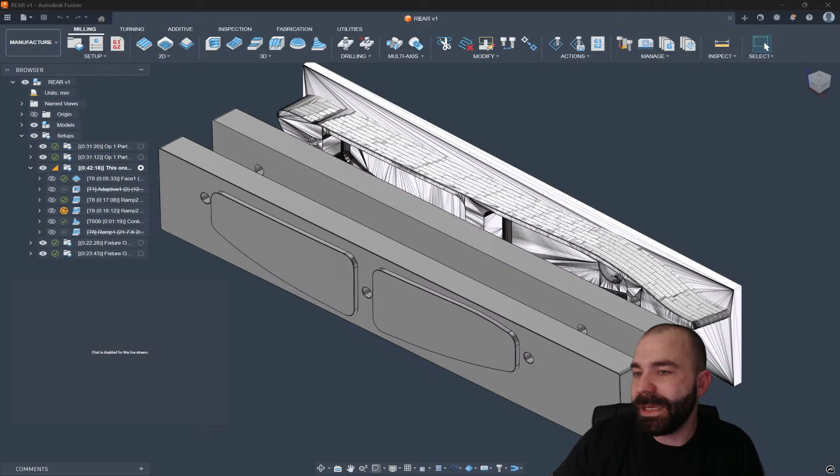In the meantime, Stuart sent me in a part, and his request on this part was we're going to skip over his first sentence here because I don't think you guys need to know that, but tidy up this 3D undercut I'm doing with the radius. Well, Stuart, can you go ahead and throw in chat to make sure? Let's see here, Woodruff style tool. I think I did under there, but I haven't used ramp. Okay, what setup is it in particular that you're working with?

I do have to jump back over to my screen in 40 minutes. Awesome, Ace, we're going to have to jump over there and make sure we catch this live, of course. So there's the limit, we're going to go ahead and cut this off about 5 minutes before the top of the hour. I know there was some conversation about using ramp.

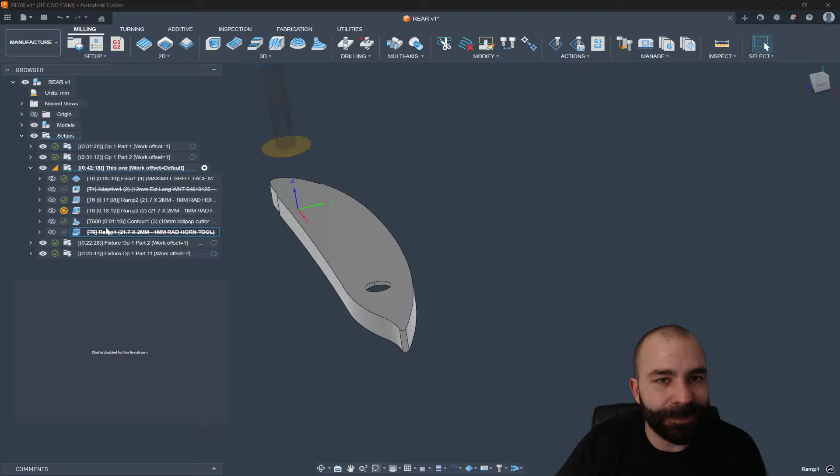I think I'm on the right setup, Woodruff with ramp. You have that labeled in here any good way, or am I on the right one? Oh, this one, of course, see? Answer my own questions when I look at it. So we have this setup, we're looking at a couple different tool paths here. It looks like he's doing some contour there on the inside.

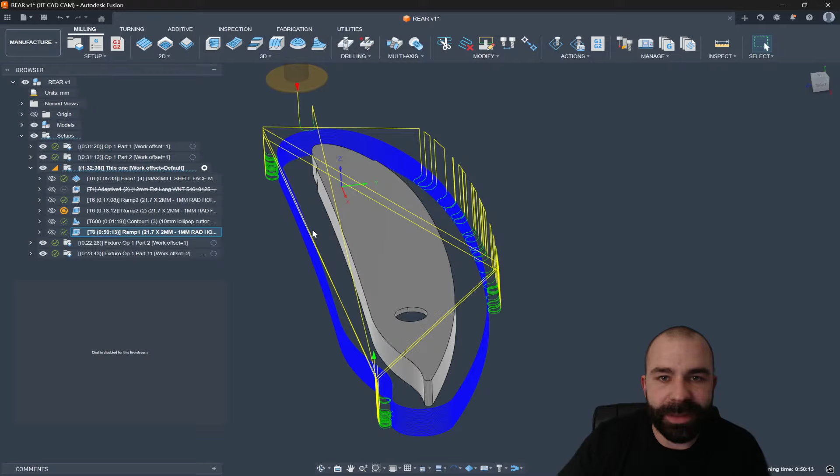Awesome. Stuart, do you not have the machining extension? You could easily deburr that hole if you had the machining extension. But either way, we're going to get back to this. So I'm going to go ahead and unsuppress this. Now I believe some of the problems that you're having right off the rip, Stuart, is you're trying to undercut, if I remember. And with that, I'm going to go ahead and do an inspection accessibility analysis.

Now, what this will tell me is whether or not there is undercuts on your part. So for those of you that don't know, right now, based on this flat surface, anything in red is considered undercut, which means the tool needs to get underneath that profile.

Again, if I was unsure about the top being flat, considering his Z-axis is that direction, I could go off the bottom of his part, and then flip to direction number 2, giving me the same results. Now, if you didn't know, you could also leave this on if you wanted and toggle that on and off over here in your design tree at any time.

So let's get into his toolpath. I'm going to go to his ramp, and with that, we're not utilizing any type of multi-axis, so we're going to skip over this and look at his geometry. Now, he does have his tool outside of his boundary.

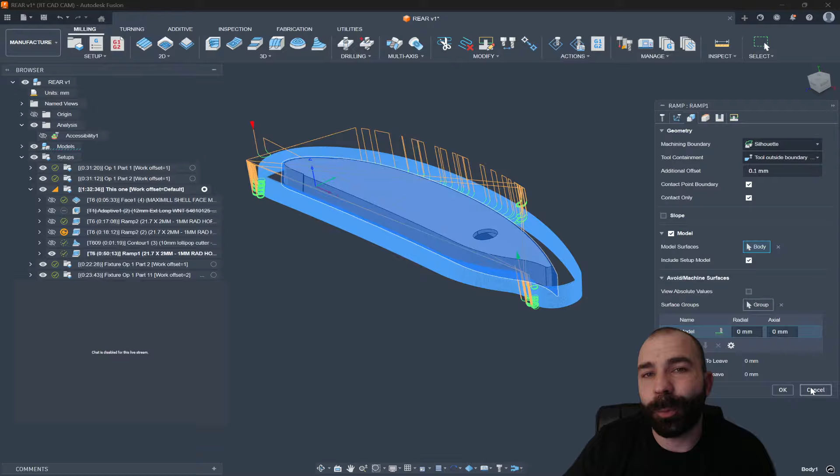Everything looks good there. However, his big problem is the fact that when using ramp, you cannot utilize undercuts with ramp, unless, and I say this, unless you're using steep and shallow. I'm going to show you guys the outcome difference between this.

So what I'm going to do is steal his information. Now, there's a couple of things here. One, contour will allow for undercutting, so we're going to grab that to start with.

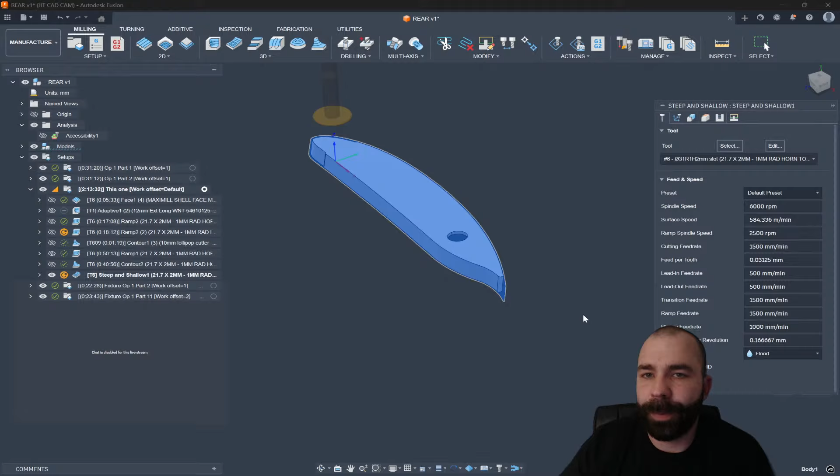And then I'm also going to go ahead and do my derive into a steep and shallow toolpath. Now, a couple of tricks here most people don't know is I actually want to go steep only. And as you're going to see, I now get the ability to machine undercuts and do a spiral, which, if you didn't know, is the ability to basically turn this from contour into ramp, right?

So again, this is why I love the steep and shallow toolpath. I highly recommend it to you guys out there, because we have that ability to utilize either a contour slash ramp, or if we were doing both, right?

So again, applications here, we're just going to force steep only. We're going to go ahead and allow undercuts, and we're going to leave everything else about the same.

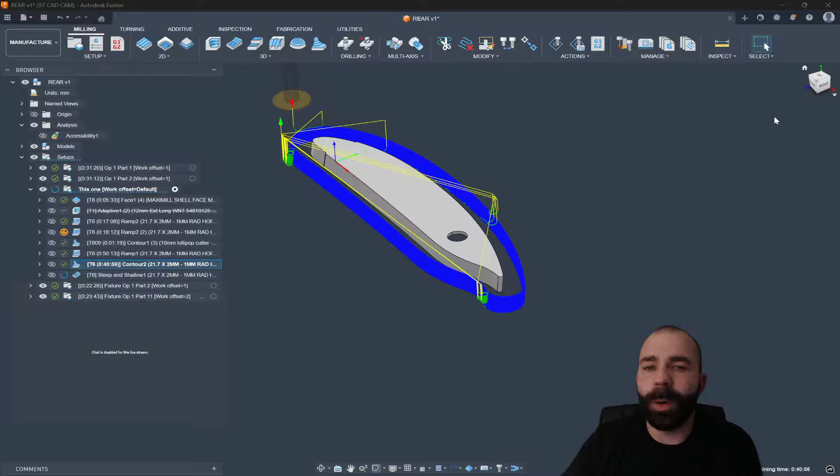I might have to come back and check. But what we would see on this part, I am going to have to do a few other things here. Let's see what else you got going on. We're going to unsuppress that so we can get our material through here.

And it looks like you approached this with quite a few different toolpaths, which is going to make it pretty easy on me to delete and remove those and then just get us a material.

So again, if you out there are utilizing a Windows machine, I'm using the hotkey F8 to turn on and turn off my stock. You could also do that down below in your toolbar by just checking that little pyramid and toggling it on and off.

So as you're seeing here, here is this ramp toolpath. We're going to go ahead and simulate this and see what we come up with. Again, I like to use comparison.

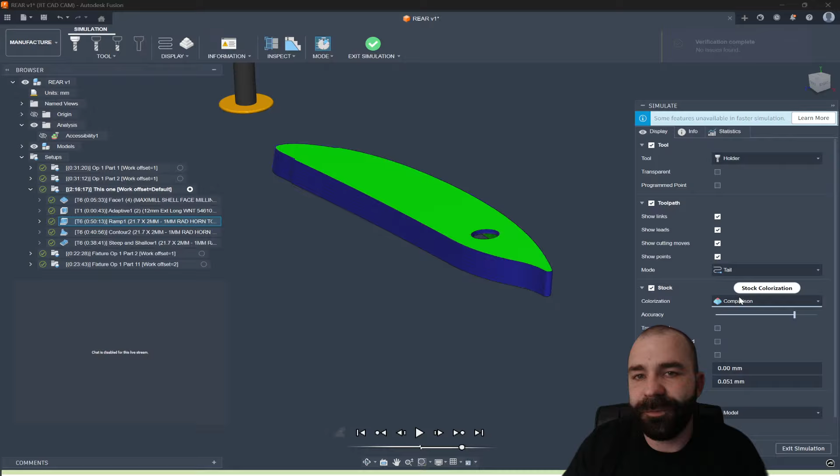Now there's a couple of little bugs here, so you know, if you're using comparison, there is a delay when utilizing fast GPU, but the delay is nothing in comparison to everything else out there. So again, we're going to go ahead and hit the play key.

I'm actually going to go ahead and pause here real quick, and we are just going to do my favorite thing, which is let's go to the end of the toolpath and see what our results come out as. So we'll give this a few seconds to calculate.

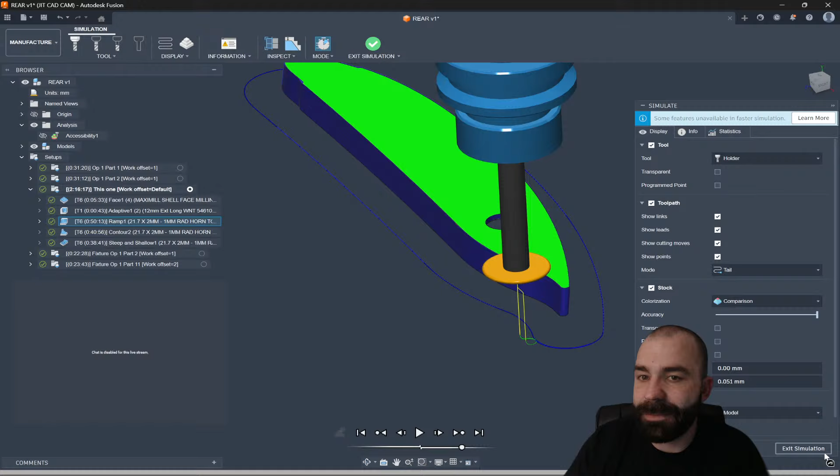Now, presumably, we still have blue material here, which makes me think that you could have stock to leave turned on, so I may need to go ahead and exit this simulation. Let's just double verify that. No stock to leave. Okay.

Now, again, we're seeing material still left on the walls here, so I'm going to step into contour and do the same thing and simulate. I may have to go back and actually use a more traditional simulation here, but let's see what we get at the end of the day once this calculates out.

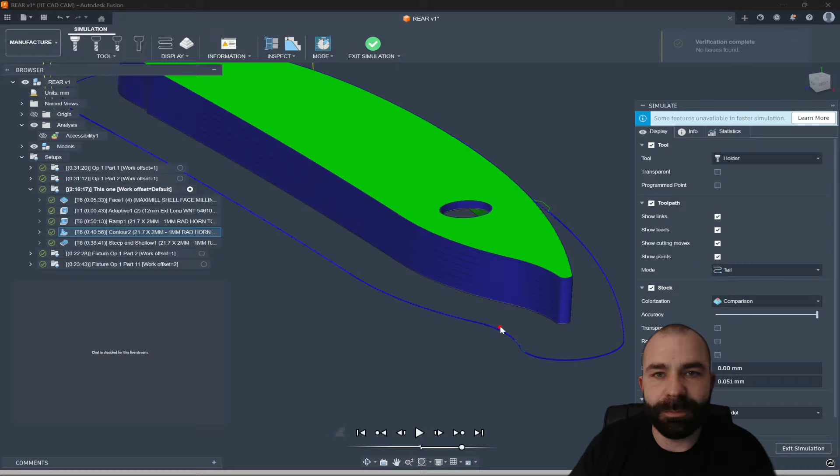So again, we're going to give that a moment. It looks like my material is just not calculating.

If we go ahead and switch from comparison back to material, we can generate that simulation very quickly and see if we're actually undercutting on that part. I'm going to do another trick here, which is say all of toolpath, and then I can more or less jump to a specific point throughout this part. So now what I'm looking for is to see if that tool is actually getting underneath and touching my material.

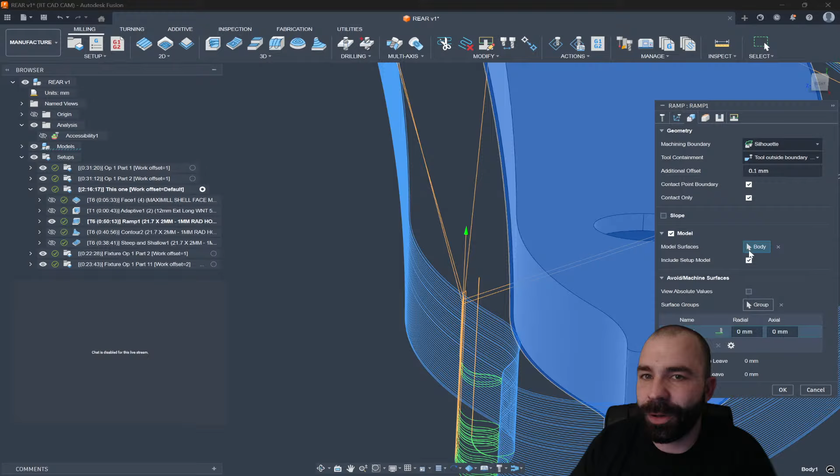It does not seem to be, which I have some ideas about. Let's go back to his toolpath. What all do we have turned on? We don't need model, I'm pretty sure, unless—I should have checked this first. I'm pretty legendary about this, there's multiple models in here, and I'm curious what he's trying to do. Let's make sure we're working with one body.

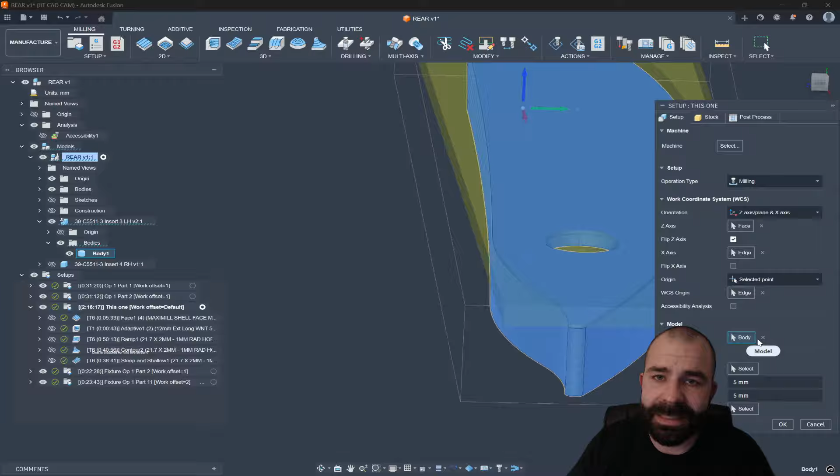We are. Let's go to our setup, of course. Are we working with the correct body? We are. Pro tip for you guys out there, I highly recommend instead of selecting a body, always try to use components. It's going to be much better on you at the end of the day.

For this use case, I'm not going to mess with it in the setup. We're going to come back to it. I'm going to jump back over to my toolpath now. Let's make sure he has that model turned off, as we were talking about. We do have contact point boundary turned on, contact only. This is where I would start turning off quite a bit of stuff.

Another pro tip, if you guys didn't know, if you do selection and don't select anything, you can also get a pretty good toolpath. So what I'm really looking for is to just get something on the part to start with. So, discarded unreachable passes—let's go ahead and do that one more time.

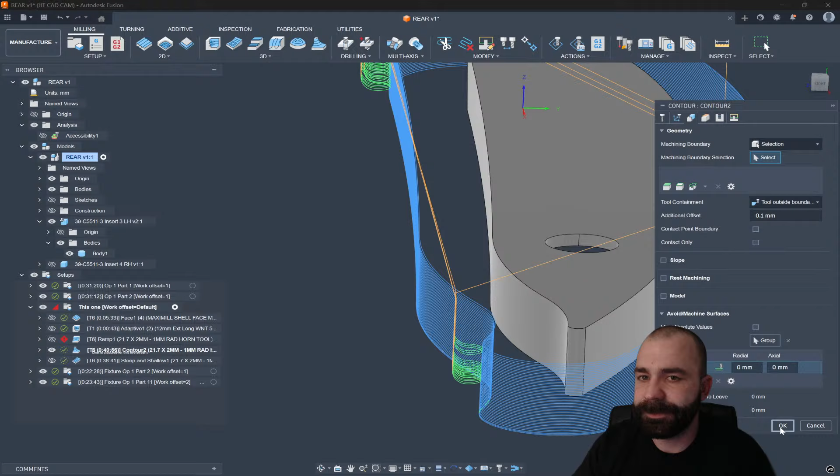We're going to jump over to the contour instead. We're going to say selection, let's get some stuff turned off, and that's going to be tool outside of boundary. Again, let's see if we can get a toolpath on the part before we start messing around too much.

Again, they may have fixed it—you used to be able to shortcut this. So let's go back to silhouette, tool outside of boundary, and see what we get.

I see some more questions coming up in chat. Napster, I see you out there. I will check into ticket 811 here in a minute to see what is going on with it.

This is one of my favorite things, is you're seeing what could be considered the master—I don't know if I'm the master, you guys tell me—is when you get to changing too many things, sometimes you cause your own demise.

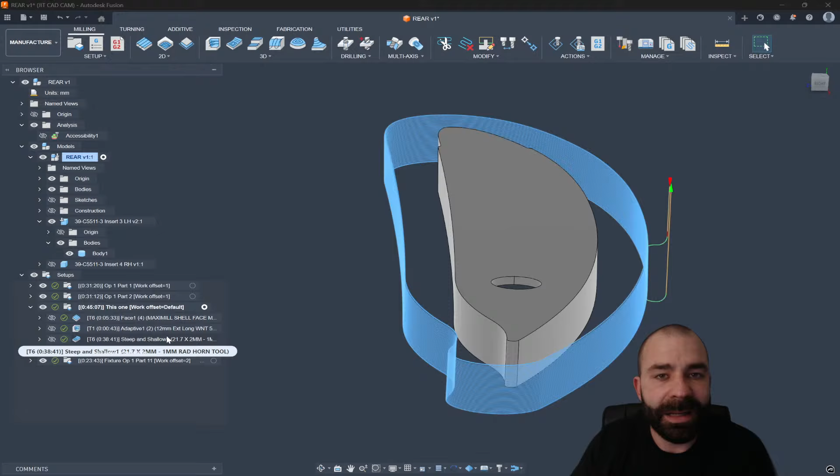So again, I'm going to go in and say contact only, and see if we still get a toolpath or if we don't. At this point, between recycling a toolpath as well as trying to force something after the fact, I'm going to do what I do best, which is go back up there to 3D contour, and let's start with the when-in-doubt, okay-your-way-out kind of move.

We get no passes to link, which would lead me to think that there's something with geometry. Again, we need that tool all the way to the outside of the boundary, and what we're really looking for is to get a toolpath. So again, discarded unreachable passes.

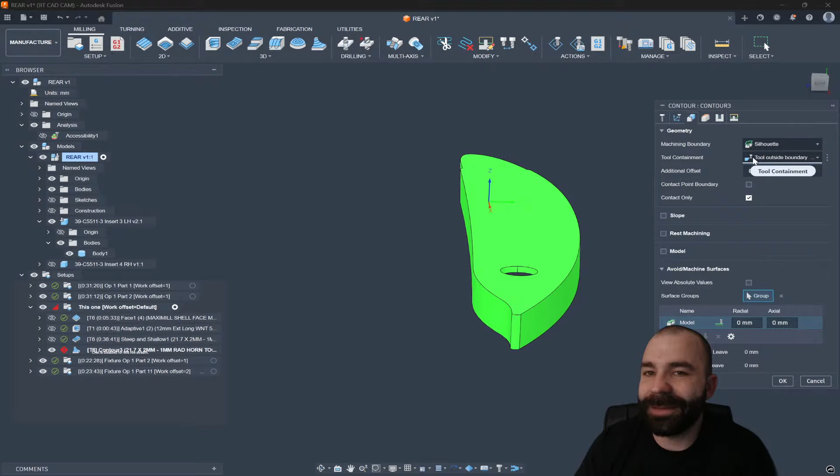Let me know in chat real quick, Stuart, was this something you were fighting on your side as well? I'll go ahead and give you a minute to jump over. In the meantime, I'm going to go ahead and grab that other ticket information. So wait for me here in a sec, guys, I'll jump right back. Got to get this part file downloaded.

And let's take a look here.

Custom tool made for it, but it doesn't want to plunge into the part. Okay, let me see if I can get this downloaded, I'm going to take a screenshot. So you're using more of a dovetail cutter for that.

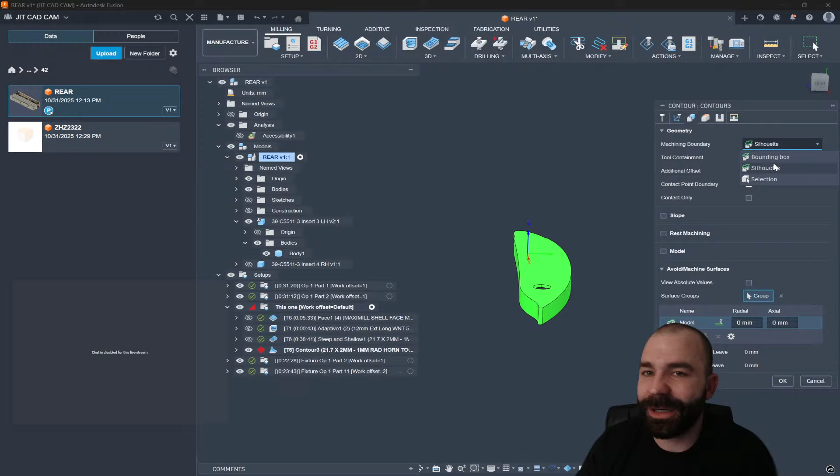So again, something is happening with this part where it does not want to machine it. We're gonna do a few things here, go ahead and go for bounding box. Again, the goal is to get a toolpath on the part. And as you're seeing, even the best of us have problems from time to time. So again, it could be, as he had, tool containment, additional offset 1, let's see what we get.

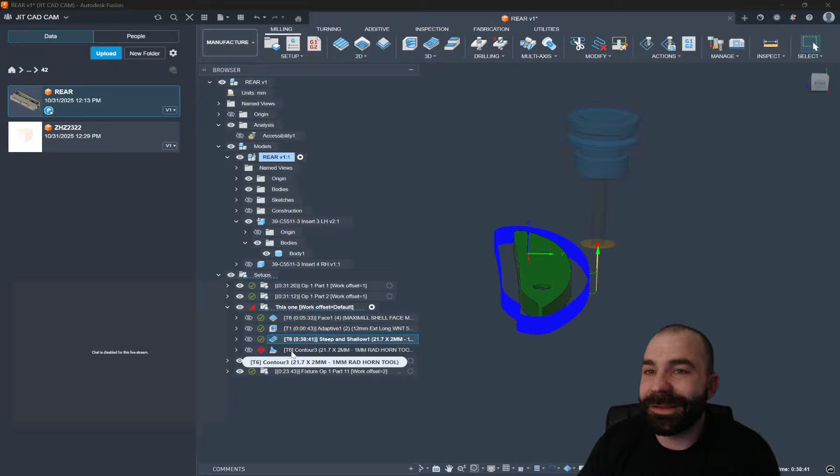I'm thinking that either my Fusion is bugged out, or you guys are probably thinking I'm wild here, but what I want you to see is, if you notice right now, and it might be tricky on your screen, this is why I like the steep and shallow toolpath that I generated. You notice there's a taper here and all those little blue lines. It's a little tricky to see if we spin our part around and look at it.

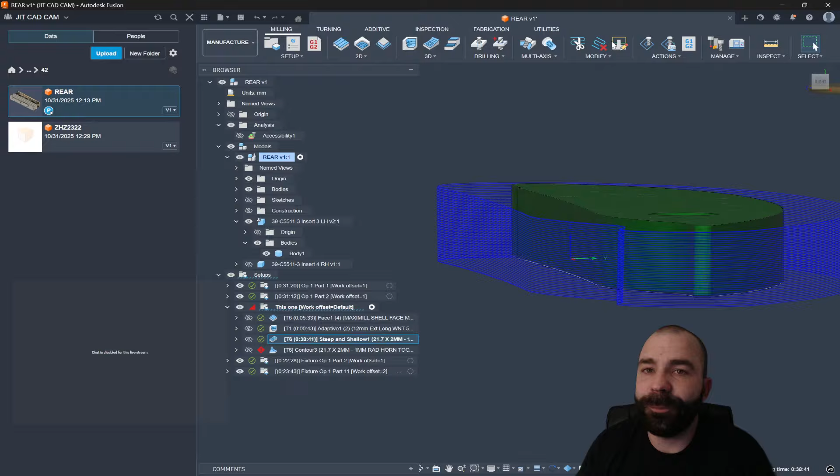However, if we were to simulate this, we're going to notice that when we machine this part, we're just going to go ahead and jump down, and then I am going to do, like I said before, go back to comparison and cause our own problems, if you guys can imagine. And what we're really looking for is to get that toolpath to make contact with the body.

Now, what I'm not seeing, and this could just be the regeneration of stock here, let's go ahead and make sure we don't have to regenerate anything. But we should be touching that undercut area. Now, tolerance is cranked pretty good, so I don't think that is our problem.

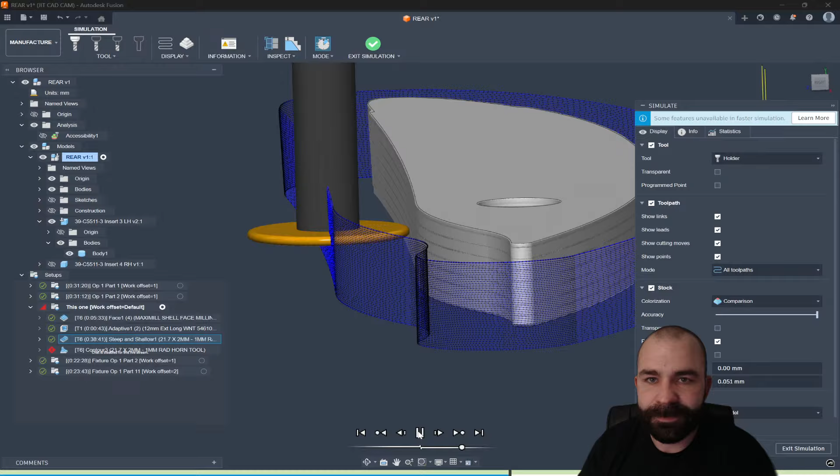And we're going to go ahead and hit play here and see if we can't get it to force that toolpath to come back up. We may have to increase our tolerance, as you could imagine. Another thing is we do have our leftover stock set so tiny.

So let's go ahead and start with just adding maybe a 1 to our stock and see what we get calculated. Again, not the best of situations. I apologize, guys, I have been driving nonstop the last 24 hours.

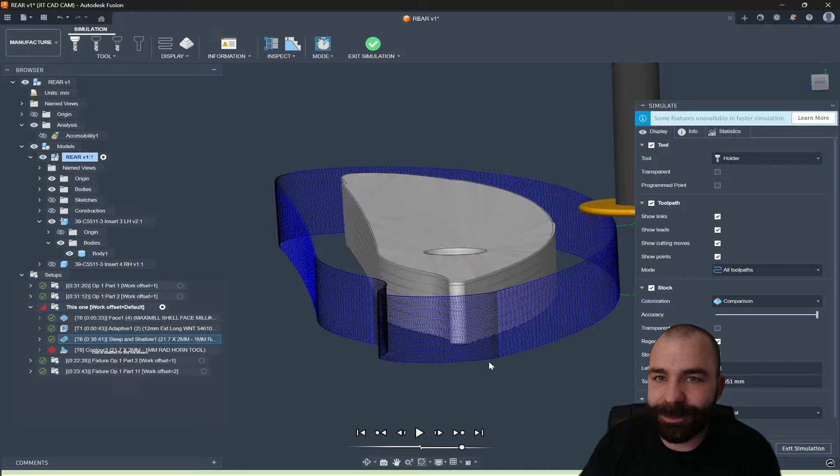And, you know, when in doubt, go back to the beginning and let's see what we can come up with. So it looks like, I think somebody's pulling a prank on me. Did you, Stuart, rough this part out without stock to leave?

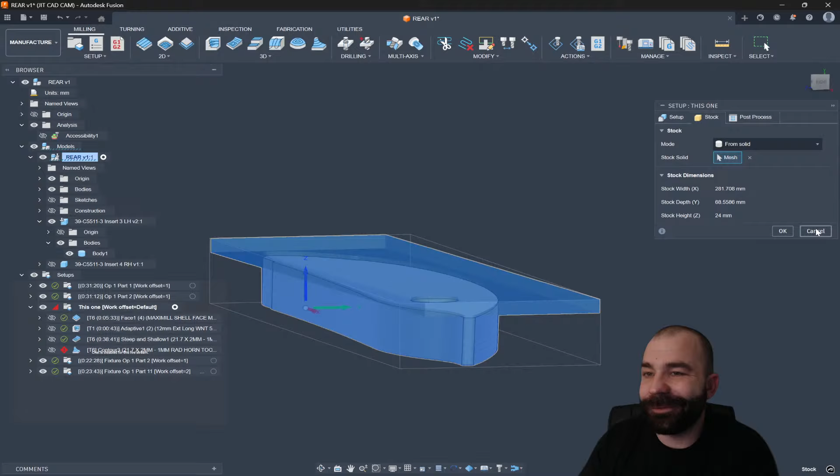Something is going on here. There is something really fishy. I now see some fishiness. This would be quite the dilemma, Stuart. Stuart, you have left me looking for Wizard of Oz because I now see our problem.

I'm gonna hate to be the one to tell you this, but as you machined through this side, you have pulled an old move that we do not recommend, which is when you go to your second setup from A to B, you exported a stock model and you brought a stock model back in. You have done more work than you need to do.

Now, this is a scenario of a left hand, right hand. So I'm going to go ahead and jump up, just let's see if you have the other one here. Yep, okay, so here is your left hand. And then here is also your right hand.

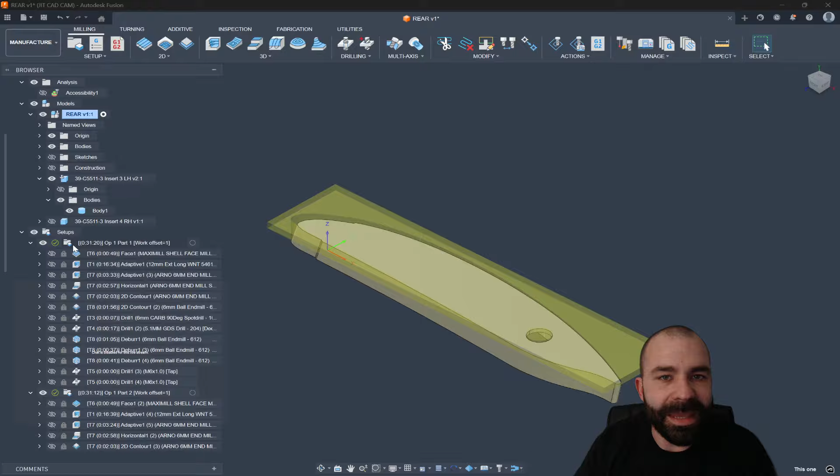Okay, so this is the value of Fusion, taking training from yours truly or watching my videos. But as you guys can see, I am going to go back and adjust. I'm actually not, we're not going to adjust. Yeah, we're going to have to adjust it. I'm going to go back and I'm going to reference the component.

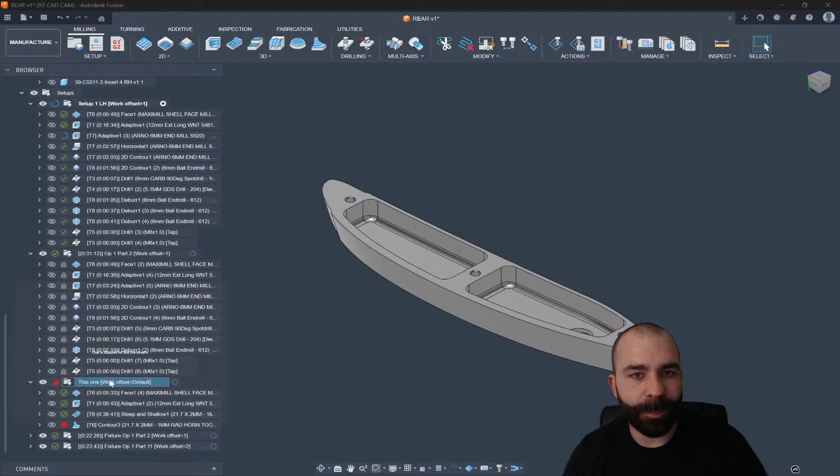We're going to have to unprotect all of his toolpaths, and we're going to regenerate. Now, a lot of people don't understand when it comes to going into setup 2, and just so we can see here, I'm just going to say this is setup 1 LH for left hand. And then we know this is now setup 2 for the left hand one.

Is when I go back in here, had I used components and selected the same component twice, what you're going to see is I can actually use from preceding, and then I can check that box continue rest machining. And then, as I always recommend you guys, click these 3 little dots, save as a user default, because you're never really going to uncheck it.

But what should happen is we are having a problem with transferring the stock from the previous setup. So we're going to go ahead and verify a few things because I think I did not select that correctly. Let's go ahead and go back. Was this a problem you were also having on your end there, Stuart?

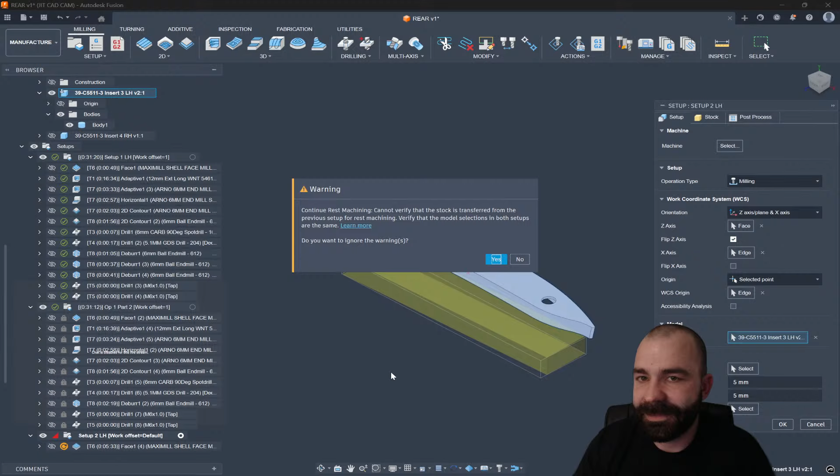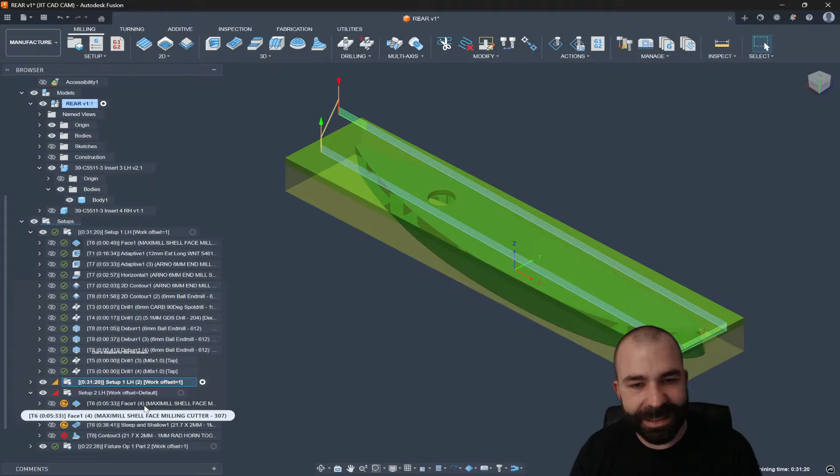Because we should be seeing material transfer from our first setup to our second setup. There's our XYZ, here's our model. I'm going to get your other setup out of the way by deleting it, because I think we're going to be in this dilemma I always hate. I'm just going to duplicate your original setup, flip your Z, now use from preceding. And of course it's going to work, because I'm now going to steal all of your tool paths and drag them over to my setup.

And then from that we should be able to verify - okay, left hand 2, that should be it. I think I dragged the wrong tool paths in here. Oh, I didn't, I dragged everything. That's right, let's get your drilling and everything out of there now.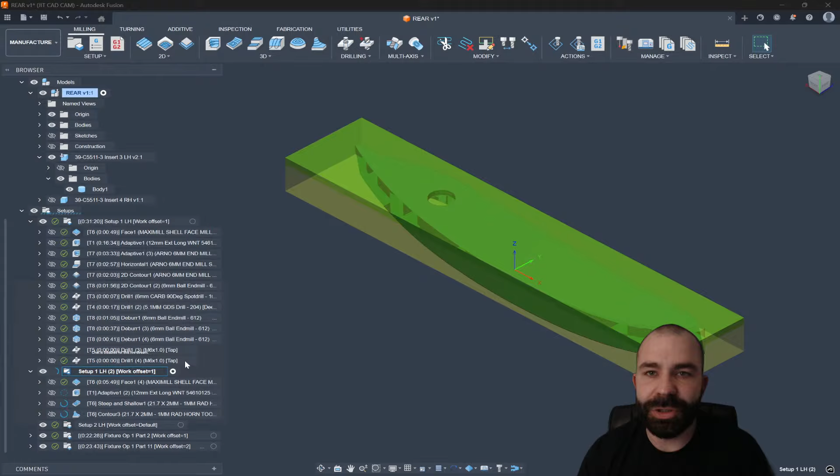So what I think has happened so far into this part is, one, you didn't have the continuous rest machining working, which caused you to use the STL export and import, right? So for some reason it wouldn't carry over. I'm making educated guesses here - pretty good today. But as we're seeing now, this was screwing us over when we were doing our simulation. I think that's where we started running into our problems.

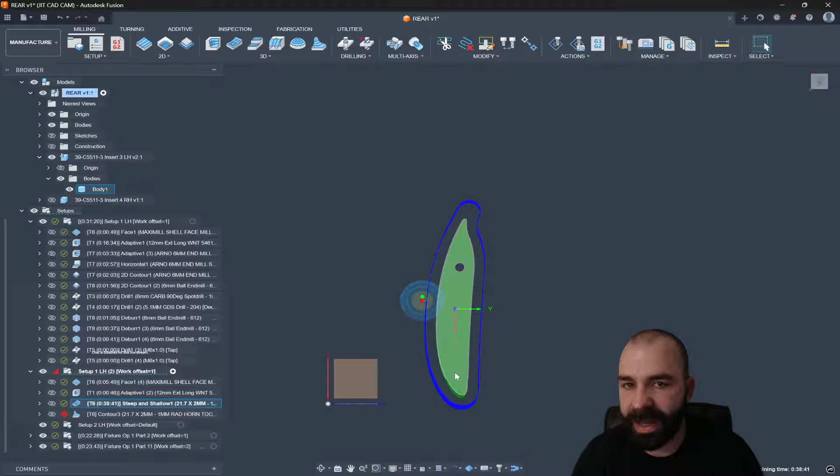Again, he does have undercutting from the other way. However, we have our roughing in place. We now have our steep and shallow tool path, which looks like it's tapering there. If we actually look top down - this is a trick if you guys ever wondered - if those walls were perfectly vertical, we would see really good straight lines of this toolpath stack. But because we're tapering up here and undercutting over here, you'll notice my toolpath is tucking underneath that part.

So again, let's see what we can get with our simulation.

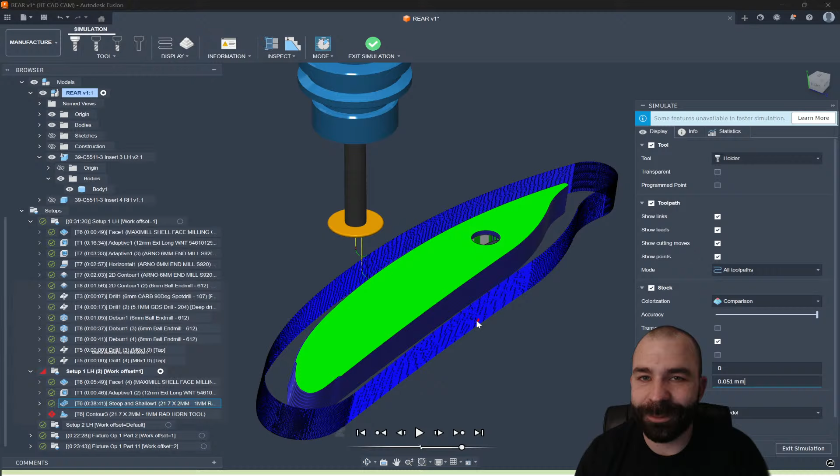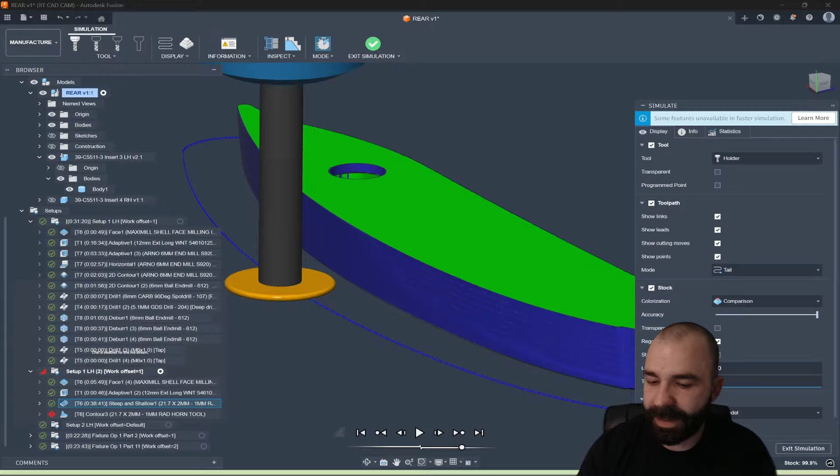So again, we're going to go ahead and do it, and let's see if we can wind it back and see if that fixed our problem. We'll give it a few seconds to load here. I'm not seeing the stock change. I don't know millimeters off the top of my head, but let's just say we're working with 4/10 inch and see if that actually triggers what we need. Again, I'm not seeing the comparison happen.

However, seems like there's some funkiness on the bottom there. We might have to do a few more things. Now, one assumption I have right now is the fact that this is blue all the way around my part, which could lead me to believe either the stock is not rendering, or my tool is not getting close enough to my part, which leads me into the realm of what happens if I just did a standard 3D contour with something like a ball end mill.

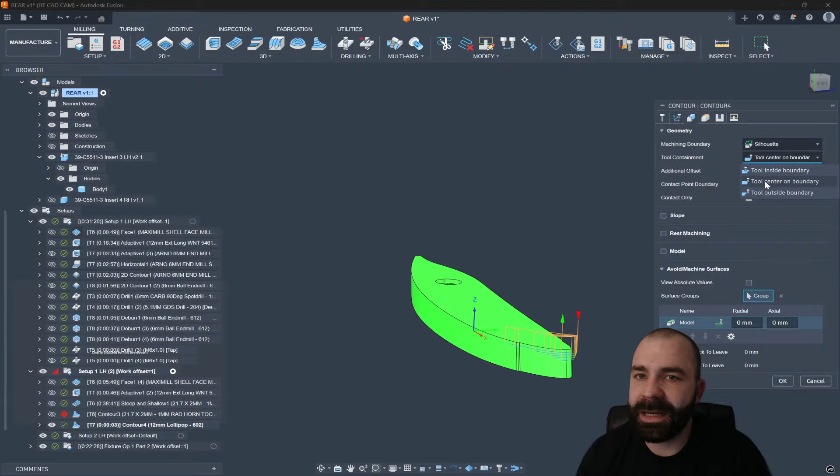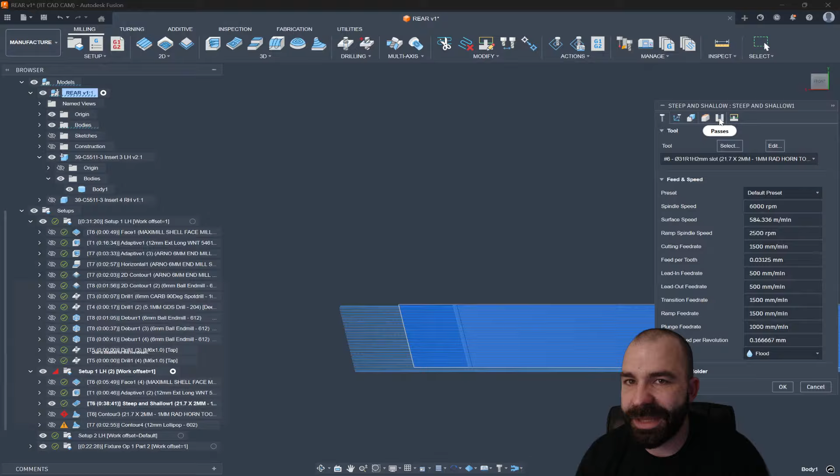Again, the idea is we do have a lovely lollipop here. Let's get a toolpath on our part before we concern ourselves with a bunch of other things. We're going to go ahead and go tool outside boundary. Now, technically, this is what a good toolpath should look like for you guys paying attention at home. And this is actually a really good example down here at the end - we're undercutting into the part. If I jump back up to my steep and shallow toolpath, it does look like we're undercutting here, which makes me think something else is happening that we're not seeing.

0.01 millimeter tolerance, okay, so I'm going to do one more thing here. We're going to go ahead and grab that lollipop cutter and drag it up. And then I'd like to simulate that to see what else we can have happen. Now in the meantime, get this popped out.

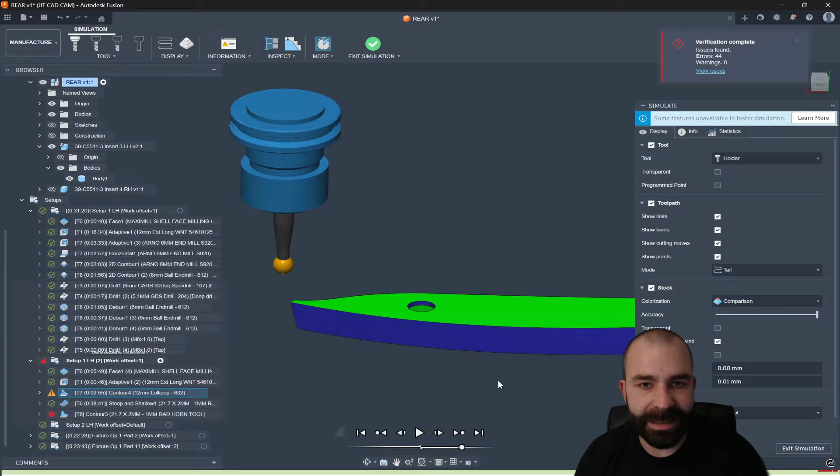So, Stuart, just to start with, as you can see, I've now replicated this with your lollipop cutter. Yes, we're not going down far enough, but we are seeing that the simulation is working here.

If I was to work on something like this, I'm going to go ahead and jump back into a contour again, swap back to your T-slot cutter, and we're going to see if that is going to work this time around. And let's drag it back up so that we can see a clean simulation.

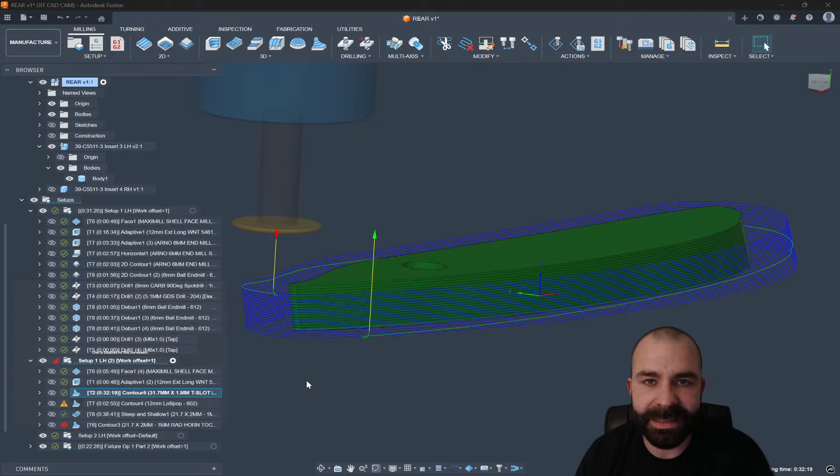Again, we're going to go back up one more step further, let the stock calculate out. Now, I am seeing the lines on the material at the end of the day. So let's go ahead and simulate it one more time.

Maybe you just got the luck of the draw that every single thing that you did was somehow causing a problem. But we're going to see here in a minute.

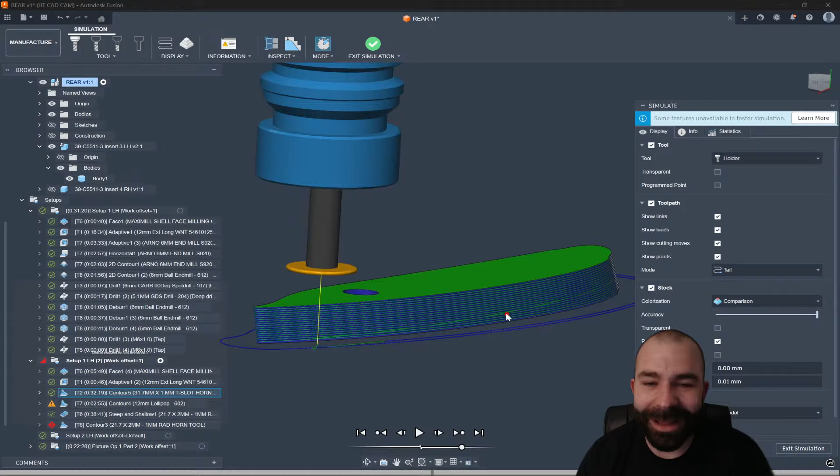Again, I don't know what you guys do out there at the end of the day, but what I'm seeing right now is that it is working, which this is now where, Stuart, we get to play the game of what could be causing that problem.

Well, looking back at your tool path here, I'm going to use my steep and shallow for an example. And what it looks like is the path that the tool is following is quite a bit different for some reason. Now that would really make me curious as to why that is.

So let's do this. We're going to go ahead and take this tool path one more time, and we are going to duplicate it.

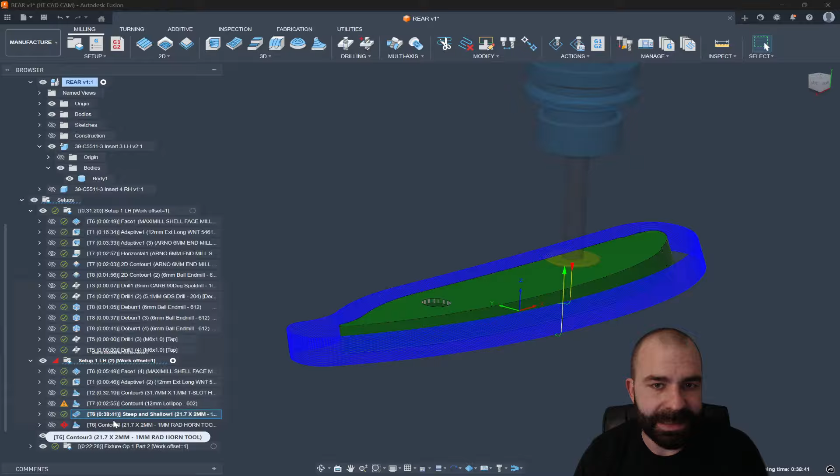What am I thinking? I'm thinking wrong. I want to take the steep and shallow, and I want to convert that into contour, because that's still using some of his original settings.

We're going to bring that back up to the top here real quick. Yep. So we are getting completely different results. If you look at these two tool paths from what I created and what he created, now I'm going to check it here.

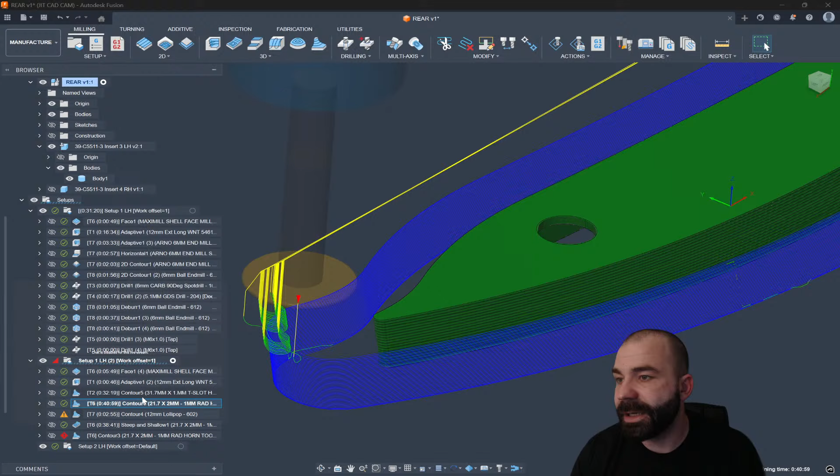There is our issue, the part that's longer. So that could answer some of our questions at the end of the day.

As you're seeing, if I do a compare and edit, I can come down here and I can see what's different. Now, we do have a little bit of additional offset, not the biggest of deals. We're using model bottom versus selection. That shouldn't affect anything. Again, tool outside versus tool center. I don't think that's going to make a very big difference.

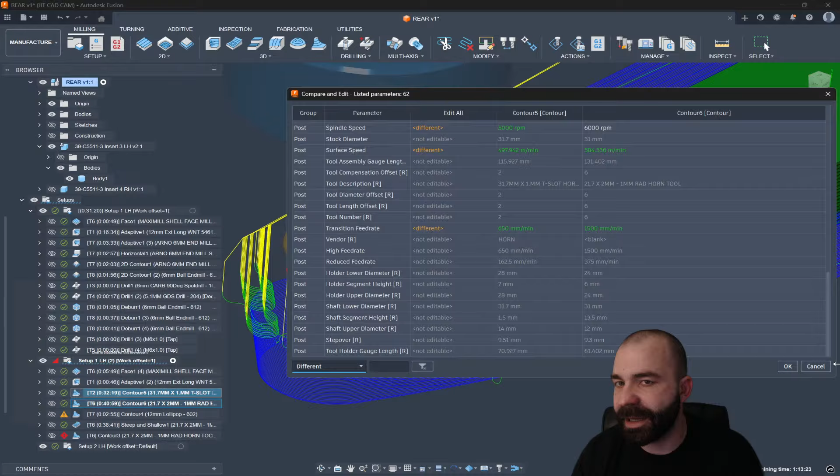I think you're correct in thinking that when you duplicated that—this is going to irritate me now because I think I know. Yes, I know. Okay, we're chasing our tails here. We're chasing our tails hard.

So when you selected another body, it's a longer version of this part, right, Stuart? And with that longer version, which one is it that you want? Because you're trying to add a body in and force a toolpath here versus selecting the right model in your setup. So as you're seeing, when you said select model, you've added the additional model here, which is floating way up here at the top, versus adding it when you did your initial setup.

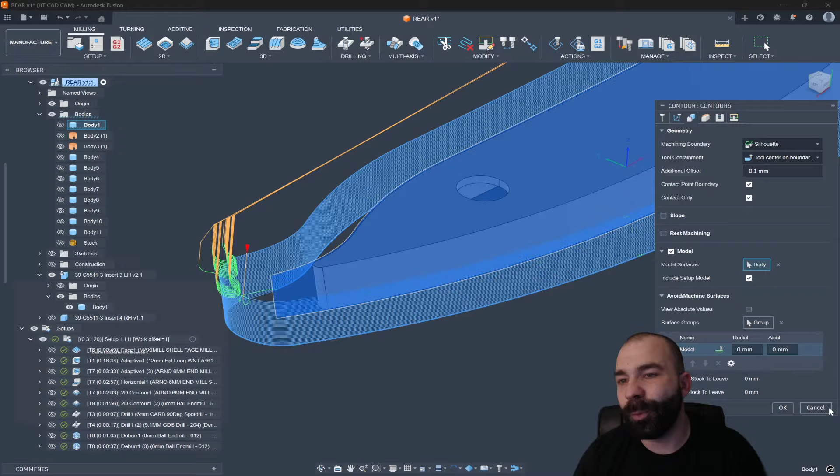So actually it's funny, because if I turned off model right now—again, there's my recalculation—I am getting that error. So we're going to have to evaluate why you're now getting that error. But as you're going to see, I'm more than certain we're going to get the same results. So again, we got tool center. Let's go tool outside boundary, see if that fixes it for us.

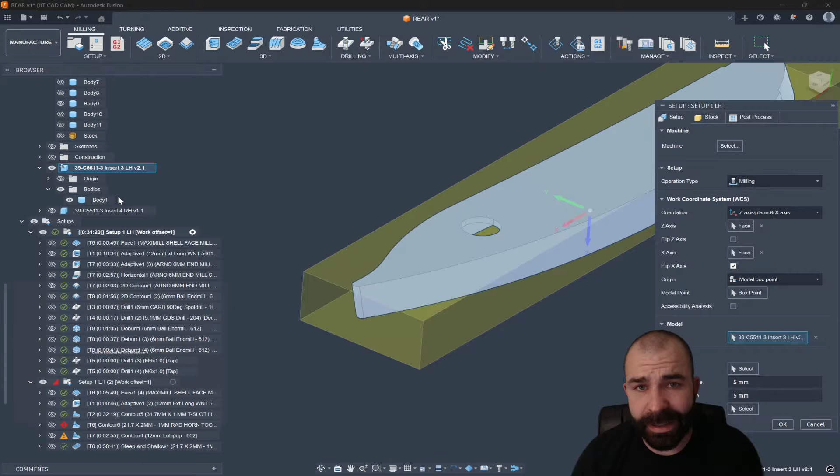But at this point, I don't want to spend a ton more time on it. I think, if this is just me, Stuart, a couple of your problems: one is when you did your first setup, making sure you're selecting the same item. Now, this is why the component side is super handy. And then when you get into your setup too, your stock is automatically going to carry over, again, because both setups are referencing the same model. Now, I say model, not body—model as in component.

From there, I don't know what happened with you adding the other body, unless you were trying to make a longer version. Were you trying to make a longer version? Let us know in chat. But I think that's causing the demise of everything else from here on out.

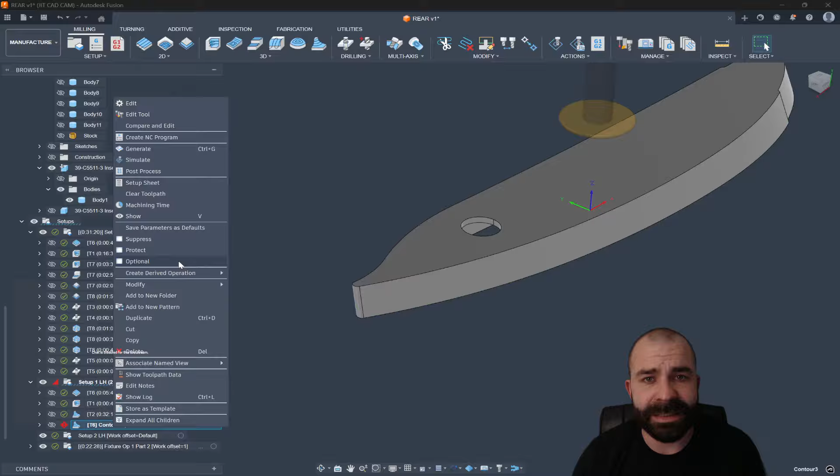So what I'm doing now is deleting everything out of my way. We're going to throw a contour at this and grab that lovely T-slot cutter to see what we get. Again, no linked pass. I do know at one time there was kind of a funky bug here, so we're going to go tool outside.

And just like that, I've gotten a clean tool path right off the rip, which would lead me to believe you were asking about using ramp initially. So let's go back and see if ramp is going to give us undercutting as well. And it does — 3D ramp does allow for undercutting.

So you want the shorter version, not the longer version, correct?

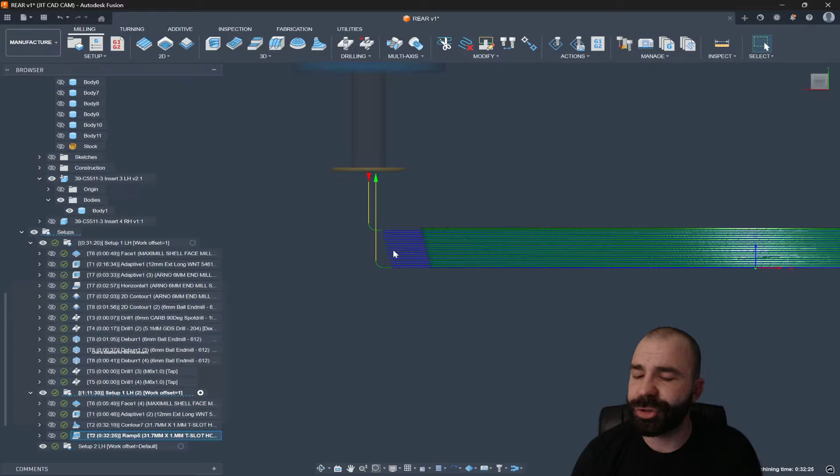In the meantime, I'm going to go ahead and pop open this other file while we wait for that to come through.

And here is a lovely valve-looking part. Now, I believe the question was about utilizing what would be considered a dovetail tool, and they are trying to cut this undercut. So again, if you're still out there in chat, the guy that sent in 811, feel free to let me know.

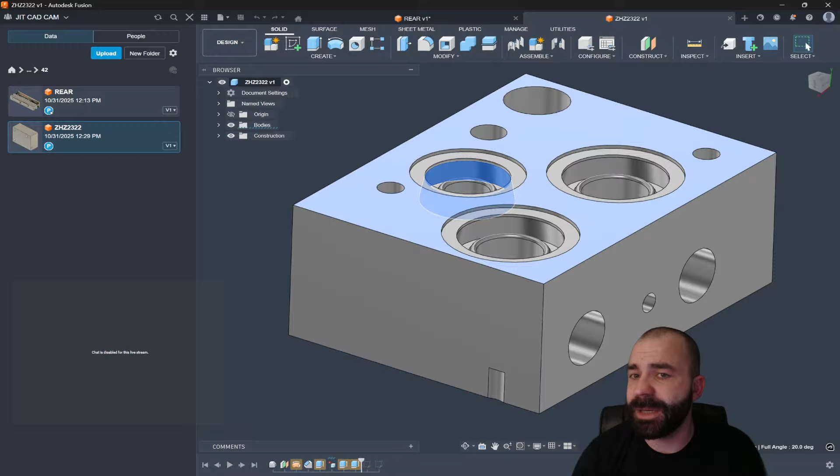Okay, so you did want the shorter version. So yeah, what is actually hurting you right now, Stuart, is there is no reason to turn on model on your toolpath. Model is always there to reference in addition to. I don't know if you've been turning it on — I see a lot of people have the need to turn on model.

But let's say, for example, I wanted to go ahead and add a patch to the top of my part, right? That would be a great time when you're in the design workspace — you add your surface patch to the top. I'm just going to grab that one. We're going to do both of them because I'm not going to waste a ton of time trying to figure out which one's which.

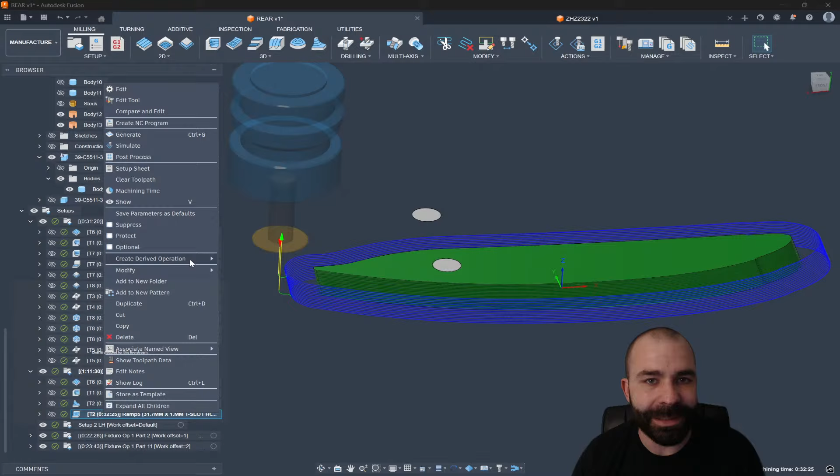But now when I'm in the manufacture workspace — I think we did this with a lollipop cutter at one point — let's get that back up here so we can see that awesome dipping into our part that we saw the first time through.

Again, we got to adjust a few things here: tool center, tool outside — I think that's all we needed. Again, we're plunging in the middle right now, right? So as you guys can see, we're dipping down inside that hole.

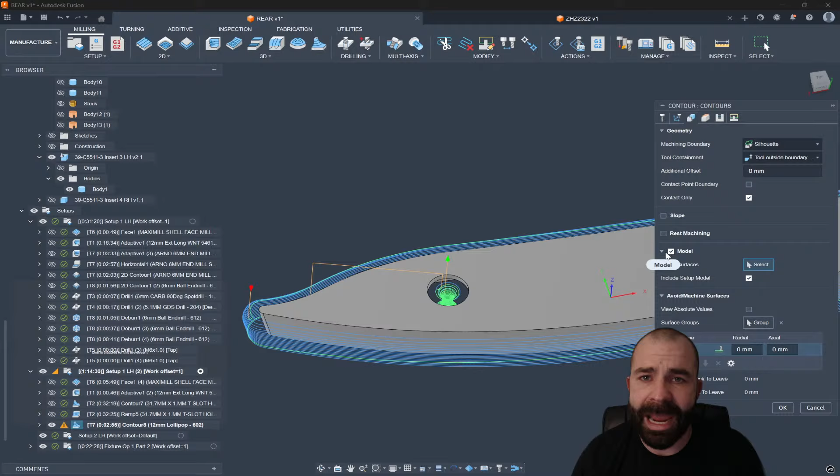If I didn't want to dip down inside that hole by using my patch, this is where I would go in and say I want to add additional models, right? Now, even though it's a surface, it's still considered a model. And if I pick that guy and hit OK a second time, you're going to notice now my tool doesn't plunge back in there.

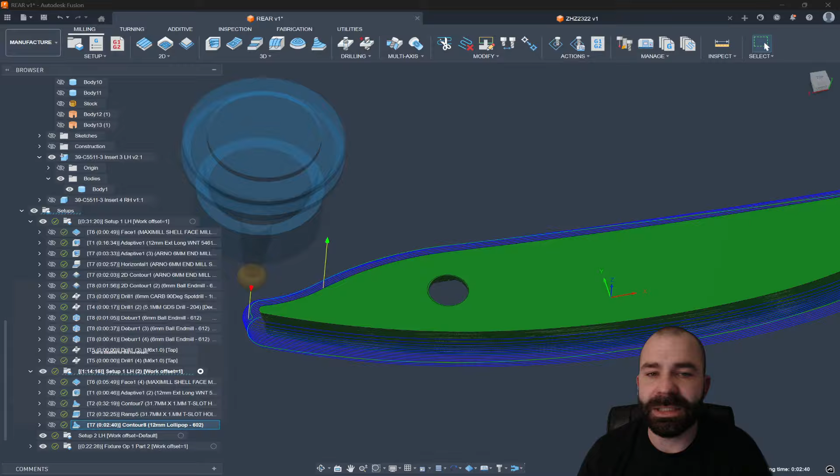So let's go ahead and go back here, looking at this part. I don't know, are you still out in chat? If you're still out in chat, feel free to throw something in there so I know you're there. In the meantime, I should probably check the ticket system, make sure nobody else is throwing any tickets at us.

So again, we're going to give this a few more seconds. Let me jump back over here. I do not see them in chat, so who knows?

Presumably, it's hard to say without having toolpaths on the part, but we're going to see if they do have any toolpaths before we dive too far into this. It looks like we're loading some cam data as we switch workspaces, and it looks like we got a bunch of red, which is always fun, right? Looks like we are trying to run a bunch of these, which is quite interesting. What do we have? One or more items have errors.

This is going to get good fast, but let's see what we have in our tool library. Again, what we are looking for is like a dovetail tool for undercutting. Thread mills. All right, tool 5. So let's get back here. You guys find it before I do. Where is tool 5 in the list? I guess the smart thing would have been to make sure that tool 5 is on a toolpath.

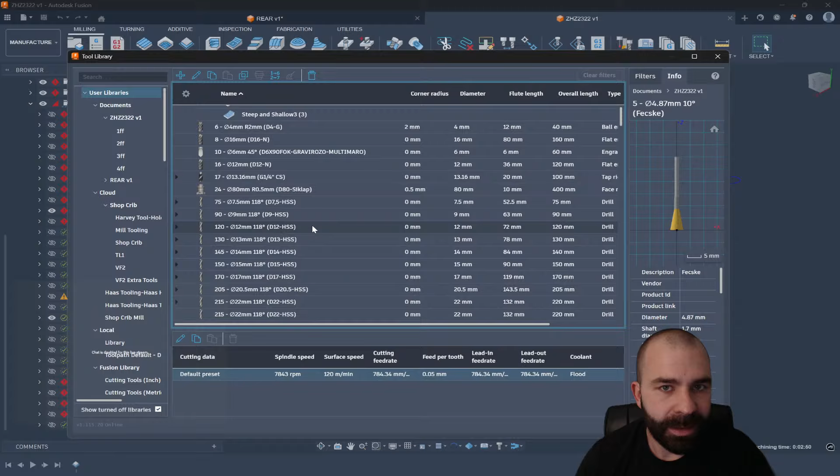You guys are seeing all my cool tricks. So again, here's tool 5. It is utilized with steep and shallow toolpaths, which I assume is probably why you're getting errors. Again, let's scroll down a little bit further, make sure there's no other dovetail cutter in here. So steep and shallow, tool 5.

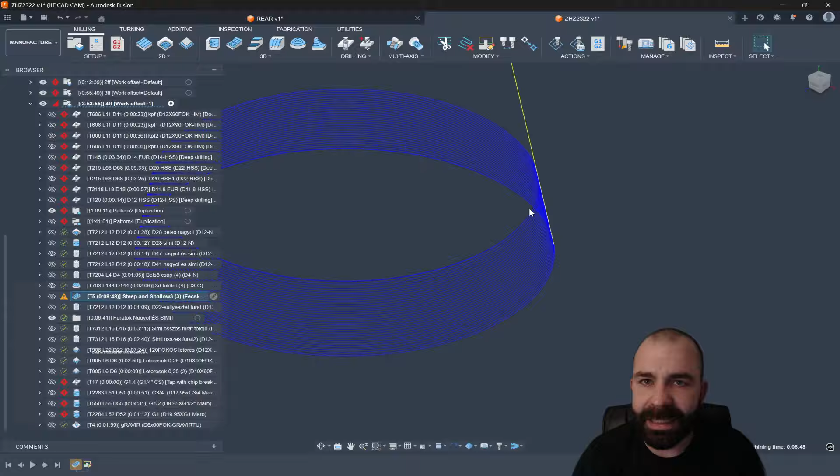So it looks like we definitely got something there, but the problem is, as it was announced, the toolpath itself, and this is going to be tricky because again we have quite the thing with the setups all over the place, but that is leading in on center and then undercutting whatever that feature is.

So again, I'm going to do my best here, guys. Let's go ahead and see if we can't get a body turned on. Hopefully one of these is it. When in doubt, just turn them all on, right? Bam. And we're going to go ahead and do the old F6 to get everything back in place. Somehow we have not turned on what I'm assuming is the body to be manufactured. Maybe we did.

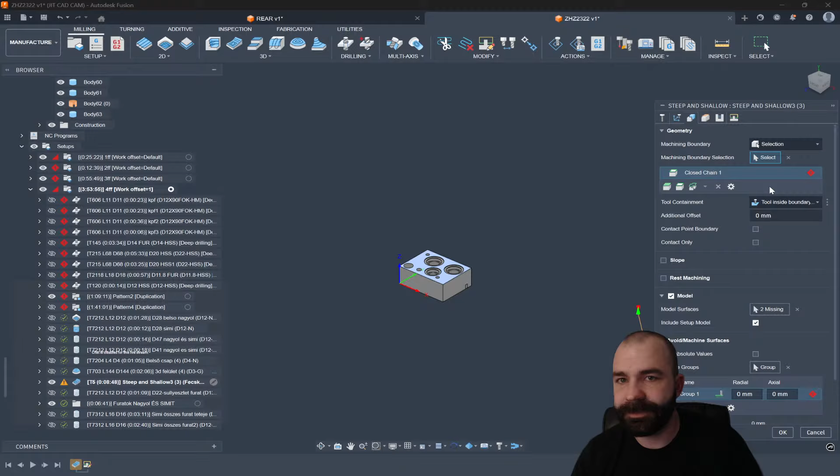We did not. So what do we have going on here, all kinds of craziness? You guys really just know how to get me going, don't you? All right. Closed chain, that's all right. We're going to go back over here, see if we can't force this guy to come back. Really questioning what's going on here.

So we're going to hit X. Surface groups, we don't need model. Let's see here. No model selected. Well, I guess we'll just go with what I'm hoping, this guy right here. What do you guys do this to me? You guys get a kick out of this?

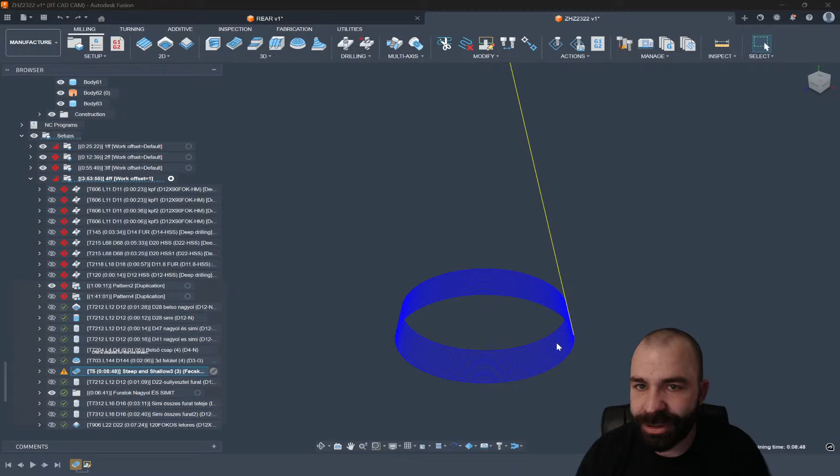Quick chamfer, all same size holes, or do you have to pick one at a time? Sure thing. So are you talking about spot drilling said holes, or do you just want to chamfer them there, deep thinker?

How much time we got? Clock is on, four minutes baby, and then we're jumping to the Too Tall Toby finals. You just go ahead and check, make sure we don't have anything else in there. Yep, nothing else in chat right now.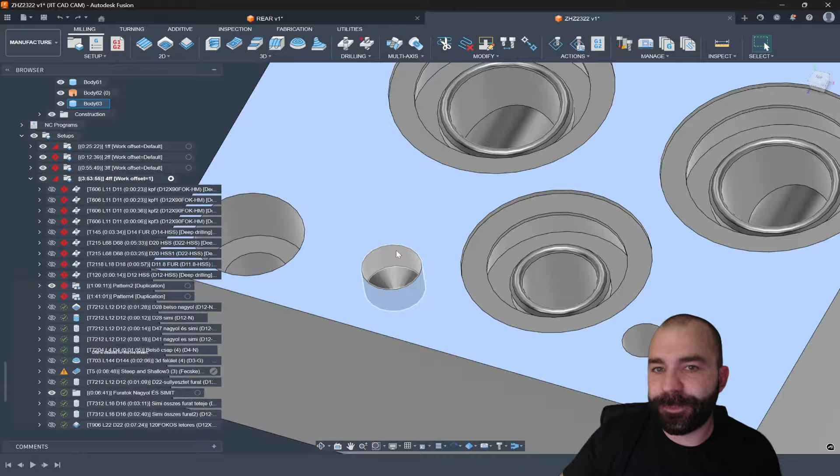Give you a few seconds there, Deep Thinker. Are you referring to all these holes up here, or are you referring to all of the actual, what I would assume are ports that are looking for gaskets?

I'm going to go ahead and jump back over. I see Deep Thinker out here sending some stuff, so let's get back to it. So what's Too Tall Toby? Stuart, Too Tall Toby does CAD versus CAD. You should go check it out. Somebody out there can throw the link to his stream in chat.

I'm finishing a turned part in a mill and just adding holes that need chamfers, but then not all the hole faces. Little crazy. I'm trying to pick up on what you're putting down here.

So Nepster, I see you out there, man. If you chopped this down or something, I don't want to—although yes, I could undo what you've done here. Again, for reasons of not sharing your files, I would highly recommend that if you can get your toolpaths on just this block and resend it, I'll take a look at it.

Again, so Deep Thinker, we got Stuart out there with $10 in chat. So from that is, let's see here, turned part in a mill, just adding holes. I need to chamfer them, but not the whole face. Okay, so if you are trying to chamfer the top side of holes, I'm going to show you guys a couple of ways here before we jump out of here.

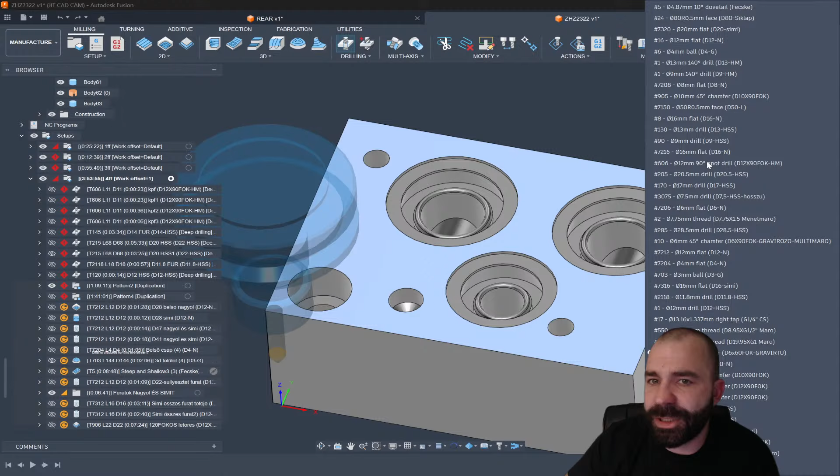So I'm going to do a drilling procedure. I'm going to go ahead and grab my chamfer tool. Now it looks like we have a 6mm. Let's go ahead and step that up. We got a 12mm here. I apologize for you guys out there that measure in bald eagles like I do.

But when you go in and you pick your hole geometry, for example, this is going to get fun because it looks like I'm not going to be able to pick my hole geometry, which leads me to believe that our holes are not square. I had this problem earlier today too, so give me a sec here.

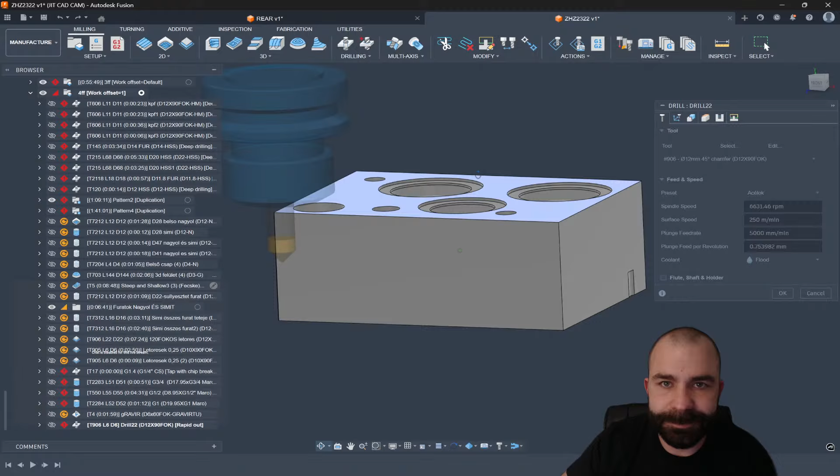Let's just go ahead, I'm going to use tool orientation to get what I need out of this thing. So there we go. It looks like, yes, that part is not actually flat to the world, which means I cannot pick a hole face, which is kind of funny. Did I not grab—I did grab a chamfer tool. It's just one of them days, right?

Why? Oh, I'm trying to think off the top of my head. I had this happen to me earlier this week too, and I just can't remember. We're gonna do what I really like to do, which is just go ahead and ditch everything because this seems to be kind of cobbled together.

Let's start with the basics, right? Z, there we go. No, model—there we go. And let's do our drilling now. So again, we're gonna go in, we're gonna pick our drilling tool, that 12mm 45, and I'm gonna go ahead and define my hole.

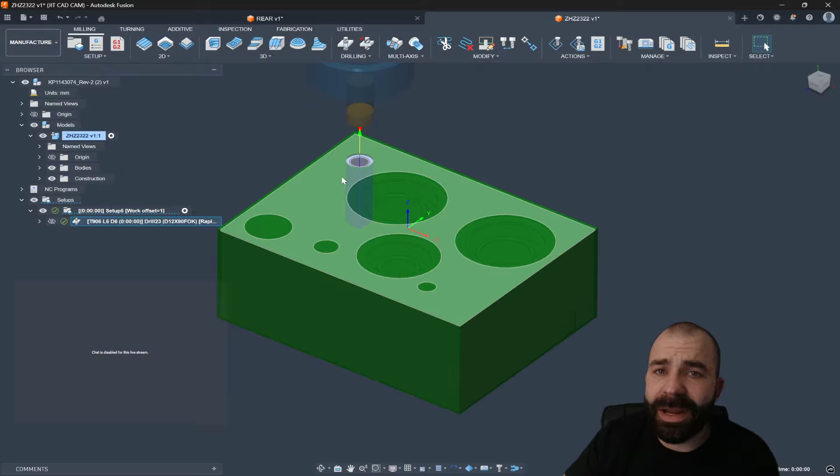Now, by default, if you just pick your hole and hit OK, you're gonna notice it's gonna do a normal drilling cycle all the way to the bottom. So again, if I don't have a modeled chamfer, what I can do is go over to my heights tab, and instead of going to hole bottom, we could actually go to a chamfer width. This is going to allow you to add a chamfer to the hole.

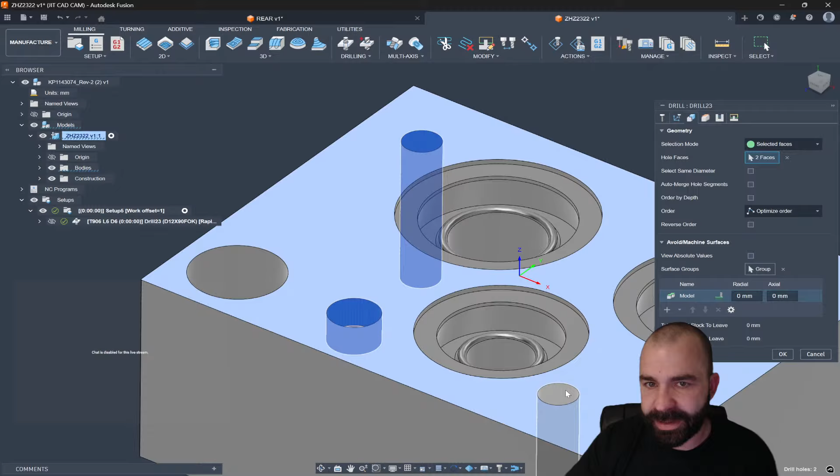Now, I probably want to get my math right here. So I'm going to go 20 thou chamfer, and you're going to notice it's automatically going to bust that edge for me. Now, if I add additional holes to this, what is nice about that is it will add that 20 thou if the tool's big enough.

Bear with me here, guys. But as you can see, we got 20 thou on this hole, 20 thou on that hole. Again, if we had a bigger spot drill, we could also do it that way as well.

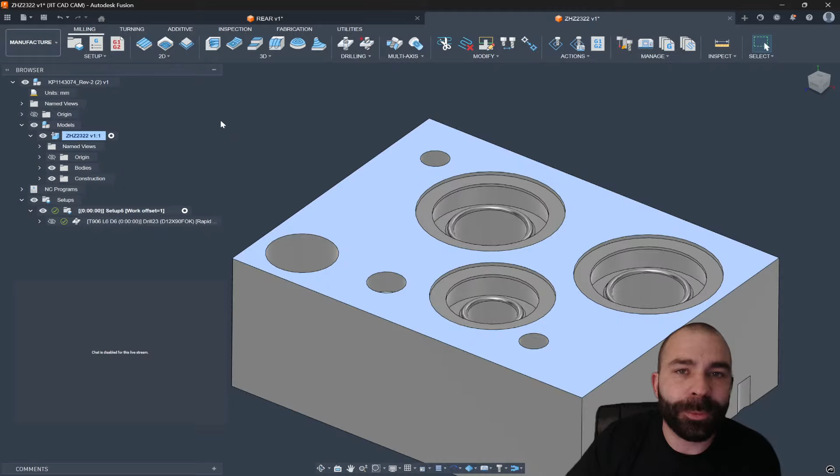So again, Deep Thinker, it's a 2-inch hole, and I can't just do a center drill. Cool, awesome. So if you can't just do a center drill operation, if you simply go down to 2D chamfer, the edge you're going to pick is just around whatever that edge is.

And then from there, we could go ahead and jump over and set our chamfer width. So again, I'm going to use 20 thou inch. This tool does not have any speeds and feeds for that, so we're going to say no to ignoring that warning, because I would assume this might have been pulled from the default library, which means there is speeds and feeds for lead in, lead out, and cutting. And just like that, I'm now machining a 20 thou chamfer on my part.

So again, Deep Thinker, if your hole has a solid edge on it with no model chamfer, just go ahead and use the chamfer toolpath. If you have something like this hole that doesn't have a model chamfer, in the event—we're going to throw this on here real quick for you guys.

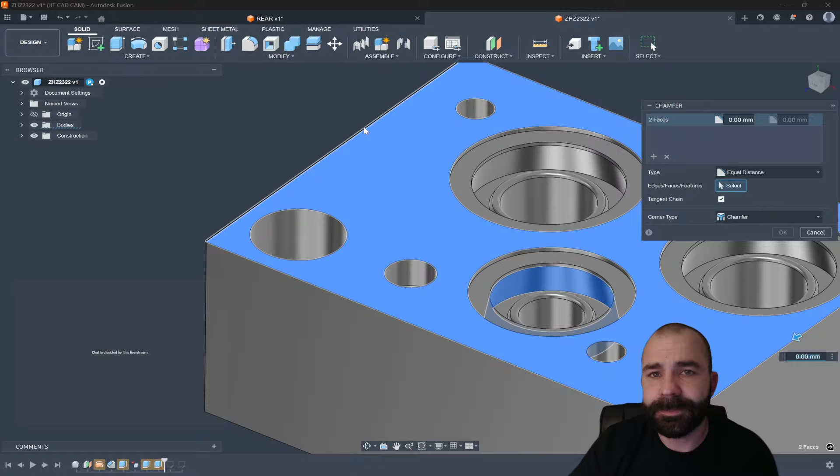So again, I've now modeled a 0.02 chamfer on my part. If I went back to Manufacture, you can use 2D Contour for this, which is what I usually recommend. The edges I'm going to select are that lower rail, holding my Alt key when I pick it. My chamfer is set to 0, and I'll give that a little offset so the tool sits down and away. Again, that's a model chamfer.

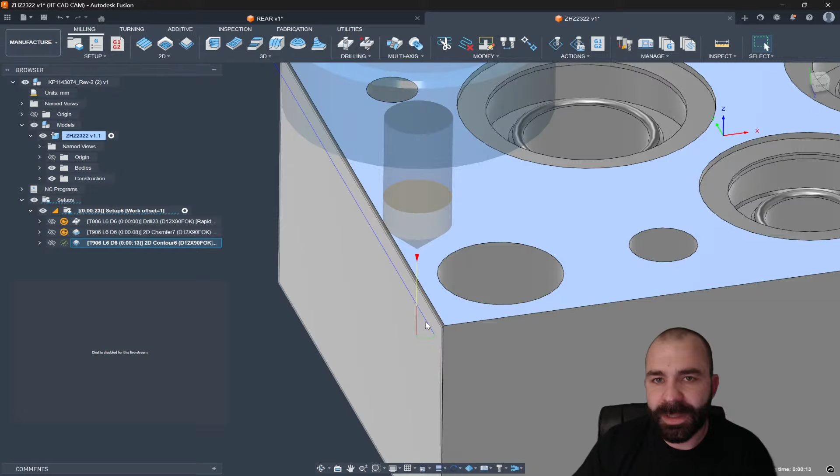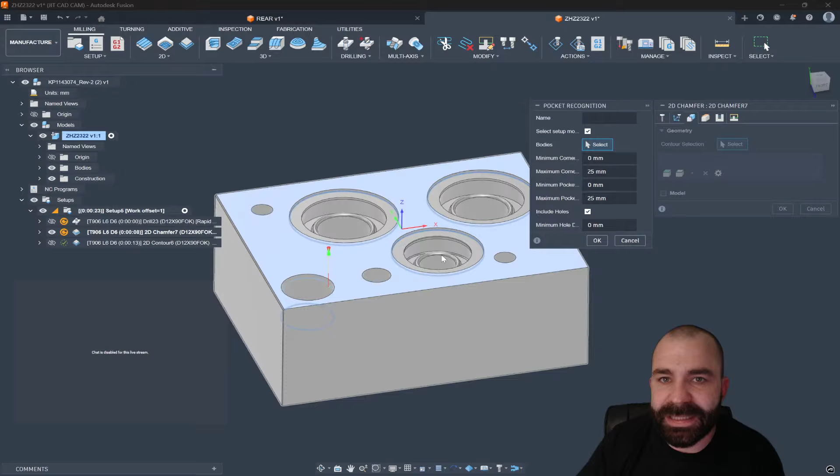So you're going to ask, do you have to pick one at a time? Deep Thinker, technically not. The reason I say that is if I backed this up, in your contour selection area, instead of using the edge selection tool, you could actually do pocket recognition. Then from there you could set your dimensions based on your part. I'm going to go 0 to 25, use our setup body, and hit OK. We're actually going to include holes here, and as you're seeing, it's now picking those edges automatically on my part. So you have that ability to fast recognize whatever it is you're doing. Again, this is just a little bit of a different way to do it. Sometimes it works, sometimes it doesn't, guys, so bear with me on it.

But Deep Thinker, you, sir, have Deburr. Why not use deburr with the ball end mill? That would be my question to you. Again, you could go in and say Deburr, and there's automatic deburring. Now you could stay with the chamfer tool too, because I believe it's going to automatically chamfer anything and everything here as you're seeing. So that's a 90-degree chamfer tool in the Deburr toolpath - it automatically recognized everything on my part. And just like that, we could keep going.

So guys, I think that's going to wrap it up for today. I don't see any other questions in there.

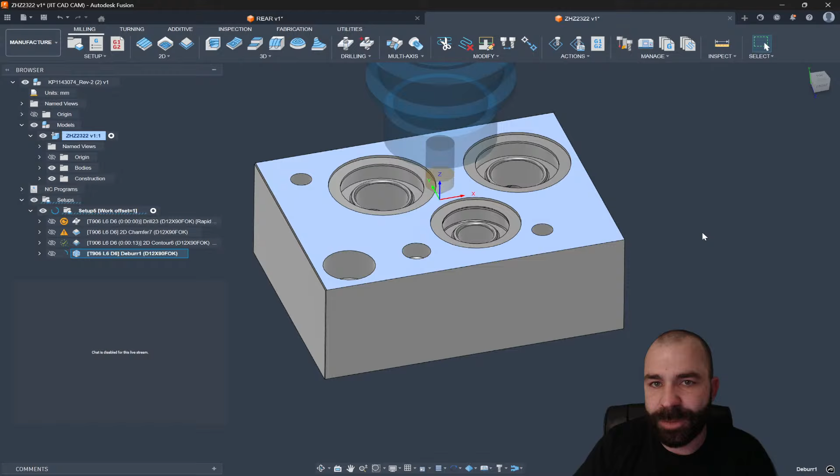Outer edges are already done. That's all right, let me go ahead and do this real quick. Deep Thinker, don't worry if the outer edges are already done - you still have the traditional approach inside of Fusion. You could utilize a machining boundary, and then say only do everything, of course, inside that boundary, and you could also exclude edges as well if you wanted to. So just keep that in mind. Again, you could just say additional offset minus 0.1, and we should be able to bring that tool in and now not touch the outside of our part. So just like that, once again, another way to approach that.